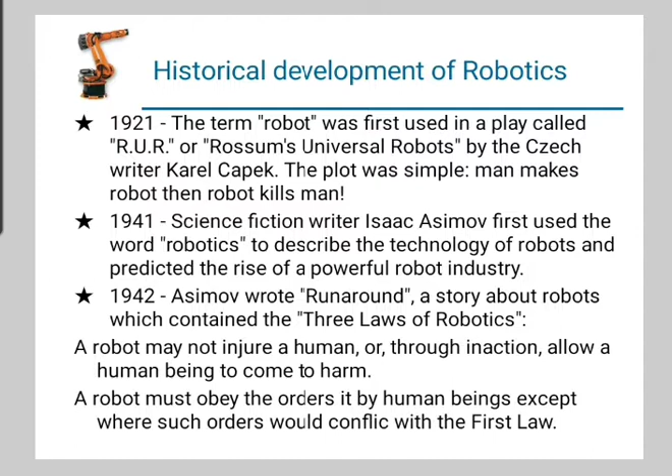The first law is the robot may not injure a human or through inaction allow a human being to come to harm. A robot must obey the orders given to it by a human being, except where such orders would conflict with the first law. Then the robot must protect its own existence as long as such protection does not conflict with the first or second law. So these are the three laws.

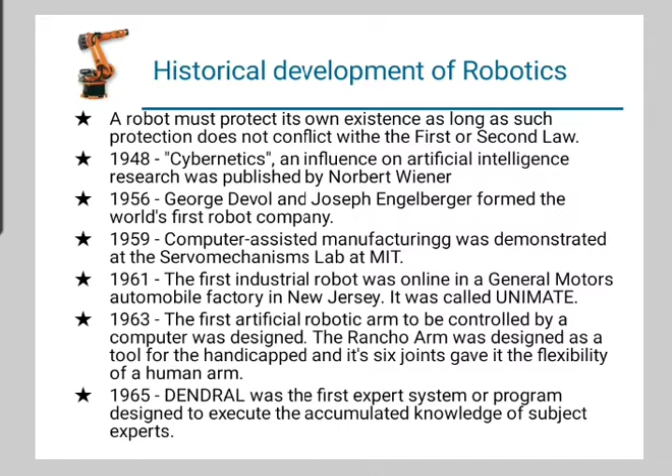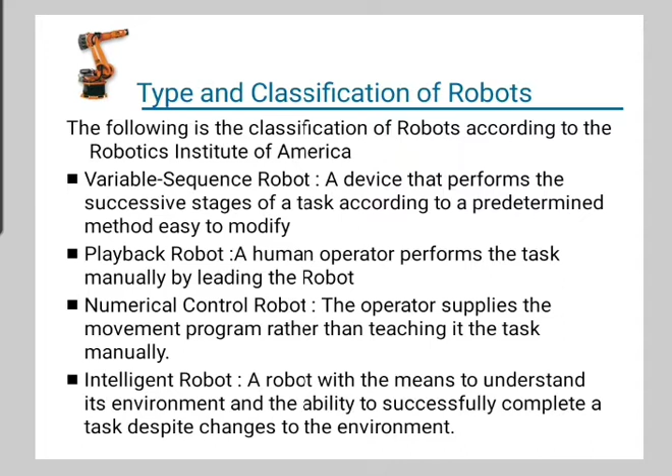And what does intelligent robot mean? A robot with the means to understand its environment and the ability to successfully complete the task despite changes to the environment. So intelligent robot means the robot can understand the environment and successfully complete the given particular task.

Then Asimov's law of robotics. There are three laws of robotics. The first law is a robot may not injure a human being, or through inaction allow a human being to come to harm.

Then the second law is a robot must obey orders given to it by human beings, except where such orders would conflict with the first law. And the third law is a robot must protect its own existence as long as such protection does not conflict with the first law. So these are the three laws of robotics.

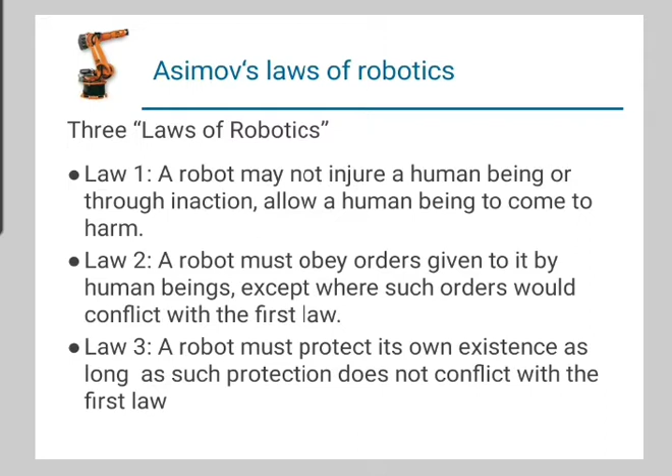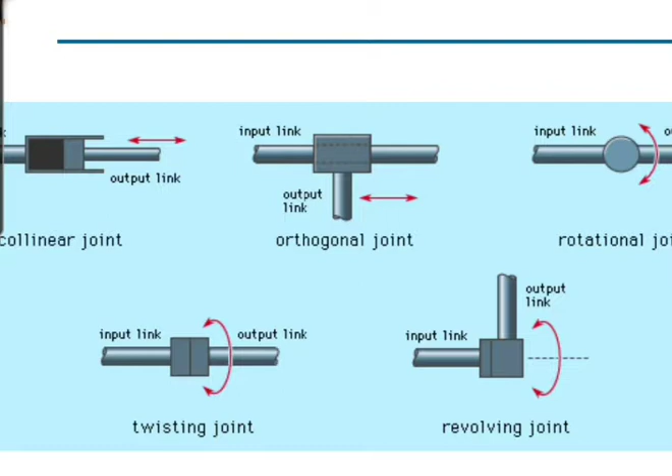Now this diagram shows robot joints. The first diagram shows the collinear joint, with the input link and output link. The second diagram shows the orthogonal joint, input link and output link. The third diagram shows the rotational joint; joints are rotational. The fourth diagram shows the twisting joint, and the last diagram is the revolving joint. So these are robot joints.

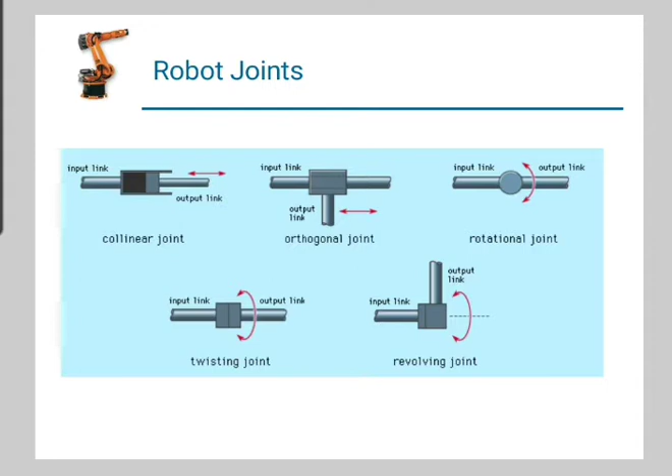Then these robot joints include two types which provide linear motion and three types which provide rotary motion. There are two types that provide linear motion, and three types that provide rotary motion. These five types of joints are rotational joint, linear, twisting, orthogonal and revolving joint.

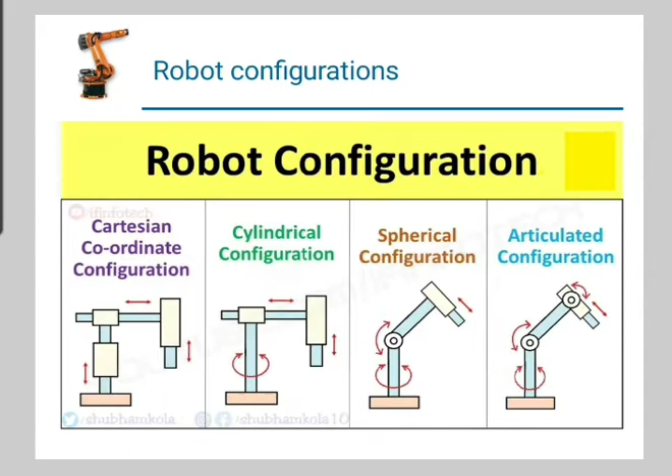Next is the robot configuration. Some of the commonly used configurations in robotics are Cartesian or rectangular. These robots are made of three linear joints, as clearly shown in this diagram, that orient the end effector, usually followed by additional joints.

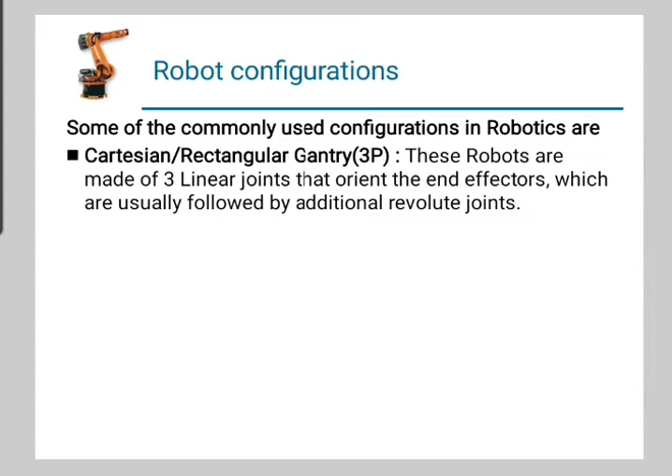Which are usually followed by additional revolute joints. Then the next is R2P, that is cylindrical. Cylindrical coordinate robots have two prismatic joints and one revolute joint.

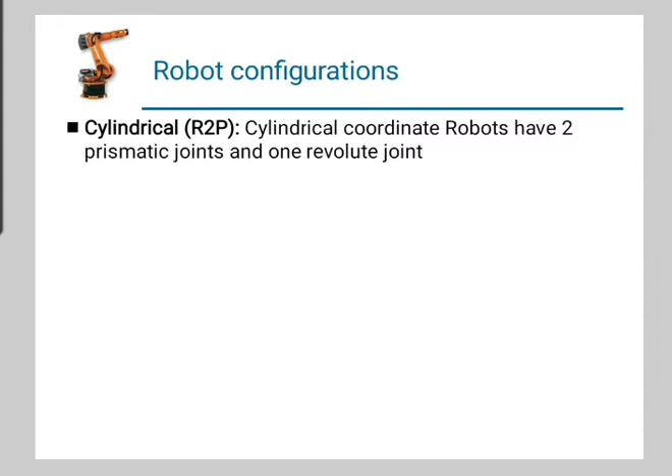Then spherical joint robots follow a spherical coordinate system, which has one.

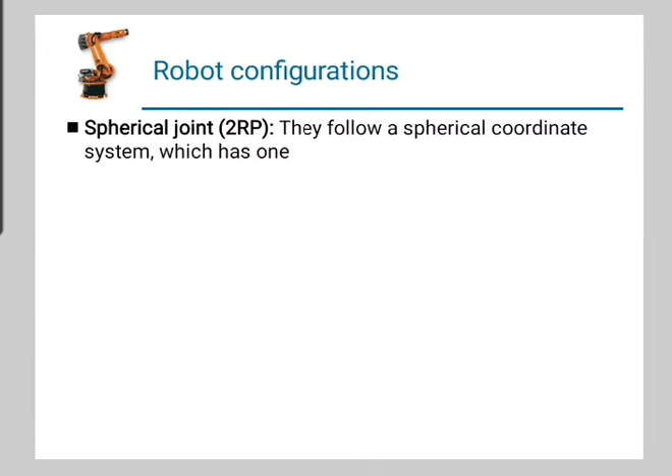Then articulated, or anthropomorphic. Here a diagram of articulated robots is shown. Here all joints are revolute, similar to the human arm.

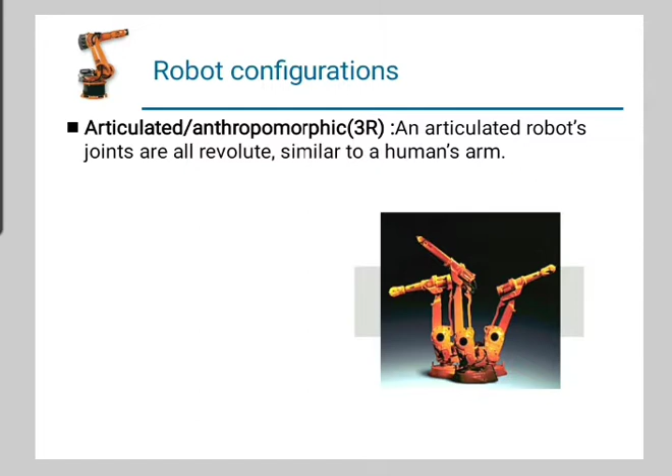Then the next is selective compliance assembly robot arm. They have two revolute joints which are parallel, allowing the robot to move in the horizontal plane, plus an additional prismatic joint that moves vertically.

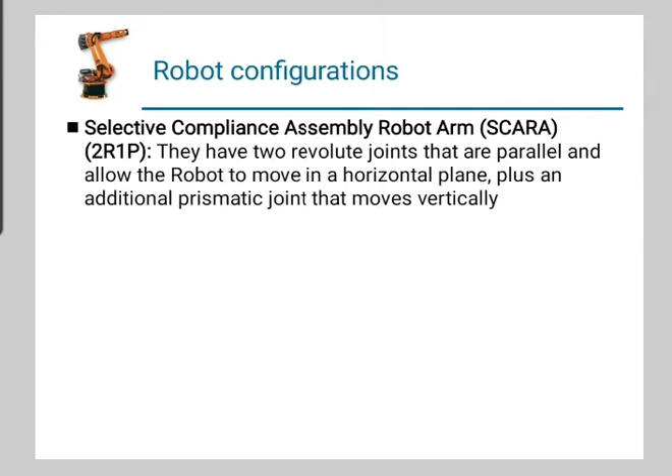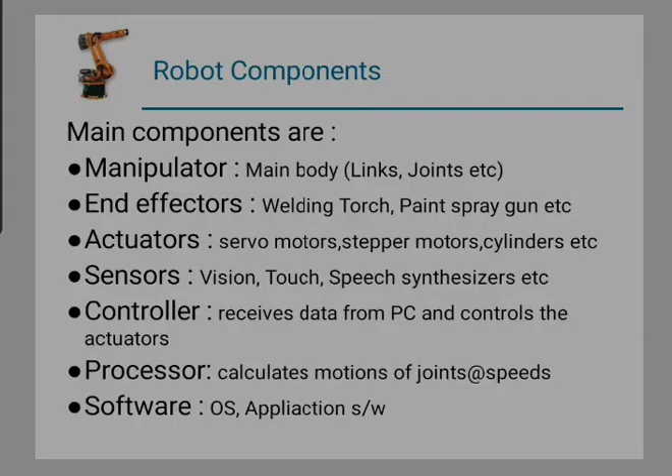Next is the robot components. These are the same as that of human beings, that is elbow, wrist, tool. Tool is a different part. Shoulder and waist. So stiff joint and compliant joint we have already seen, the degree of freedom for the different joints.

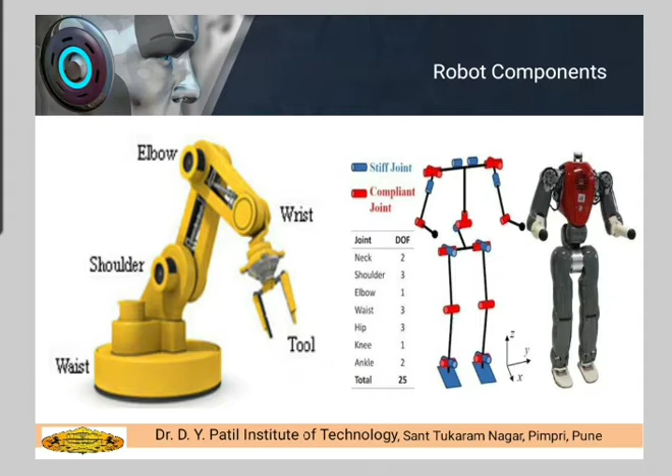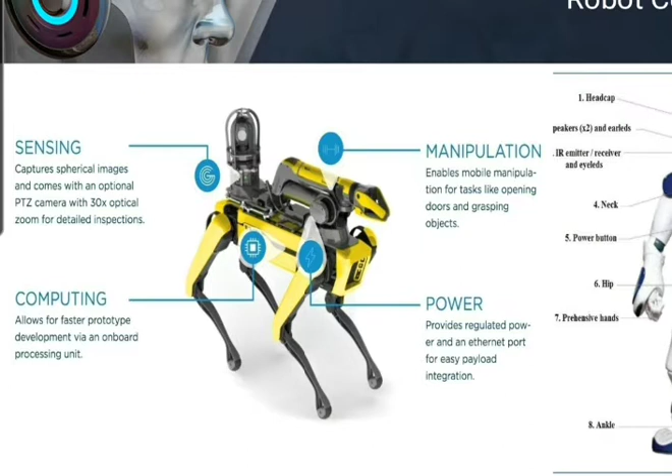Then next is this robot component, that is sensing. Sensing means it captures spherical images and comes with an optional PTZ camera with a 30x optical zoom for detailed inspections, so the image will be more clear.

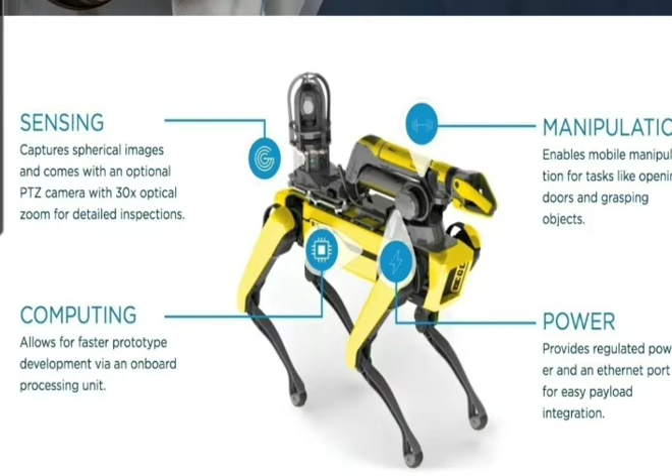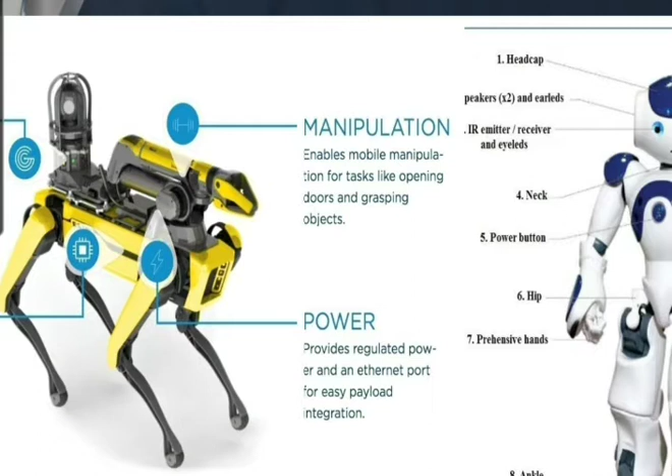Then next is computing, which allows for faster prototype development via an on-board processing unit. It also consists of manipulation, enabling mobile manipulation for tasks like opening doors and grasping objects. Then power, it provides regulated power and an Ethernet port for easy payload integration.

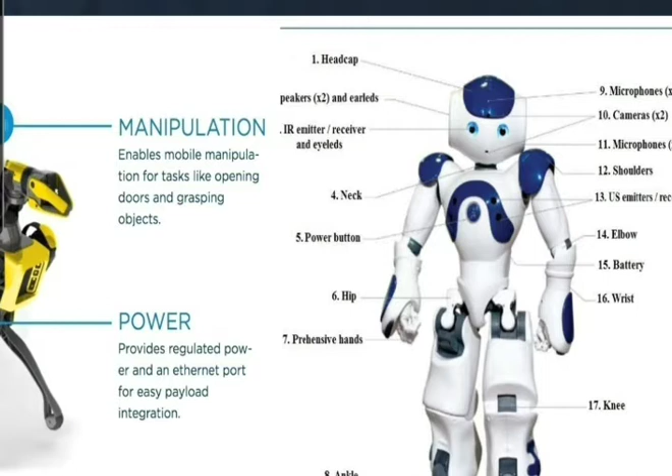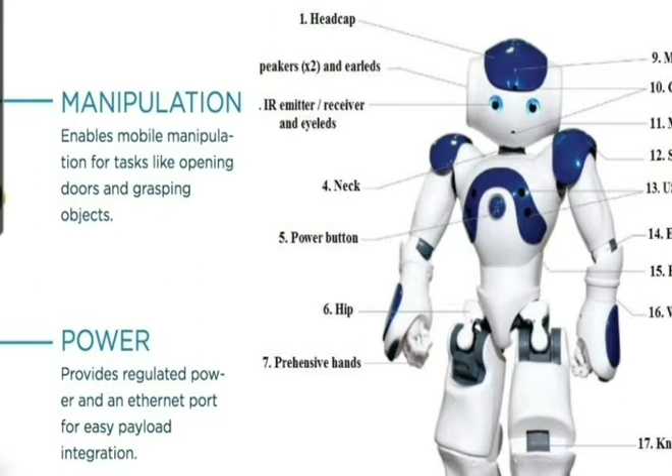Here the diagram of the robot is given, which consists of the head cap. The different parts are given here: ear LEDs, IR emitter or receiver, neck, power button (at the center), hip, prehensile hands, bumper, knee, wrist, battery, which is also below the power button.

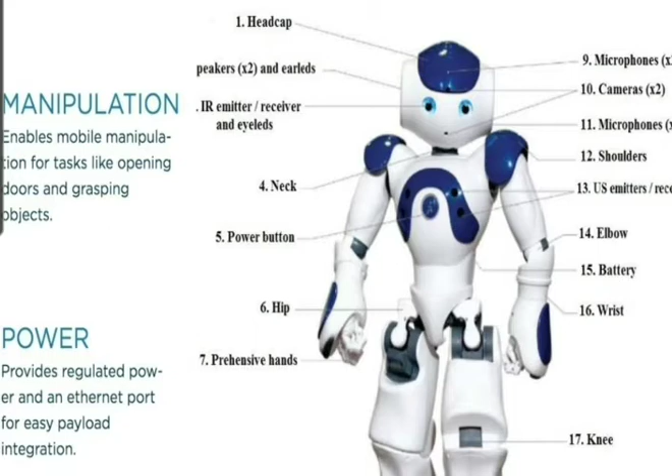Then elbow, US emitters and receivers, shoulder, microphone, camera, and one more microphone which is at the forehead. So these are the different components of the robot.

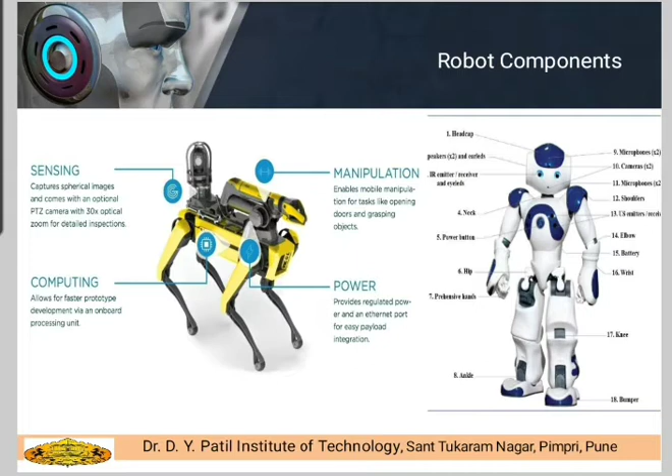Then the next is robot degree of freedom, that is the number of independent movements a robot can perform in 3D space. What is degree of freedom? It means the number of independent movements a robot can perform in 3D space, or the direction in which the robot moves when a particular joint is activated.

To fully place the object in a space and also orient it as desired, we need to have 6 degrees of freedom. A system with 7 degrees of freedom does not have a unique solution, that is a robot which is mounted on a conveyor belt or mobile platform.

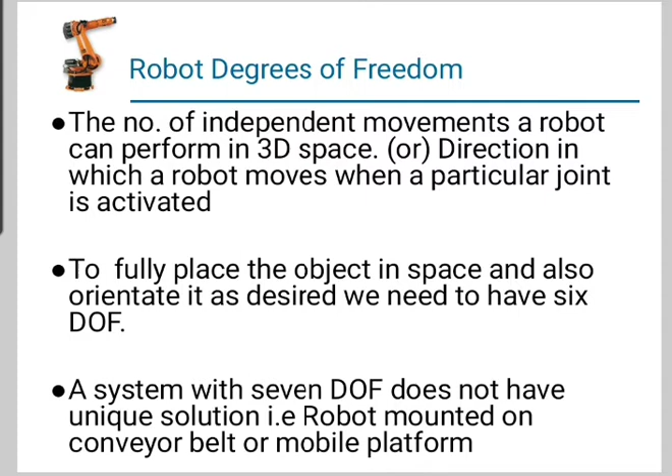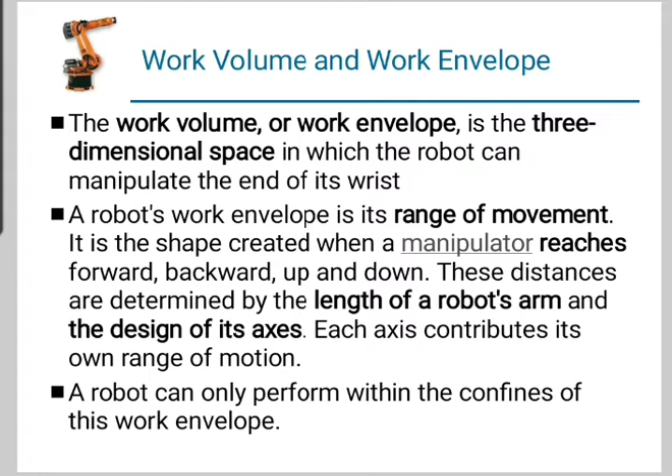Then work volume and work envelope. The work volume or work envelope is a three-dimensional space in which the robot can manipulate the end of its wrist, and the robot's work envelope is its range of movement. It is a shape created when a manipulator reaches forward, backward, up and down. These distances are determined by the length of the robot's arm and the design of its axes, and each axis contributes its own range of motion. So the robot can only perform within the confines of this work envelope, that is the working pattern of the robot is fixed.

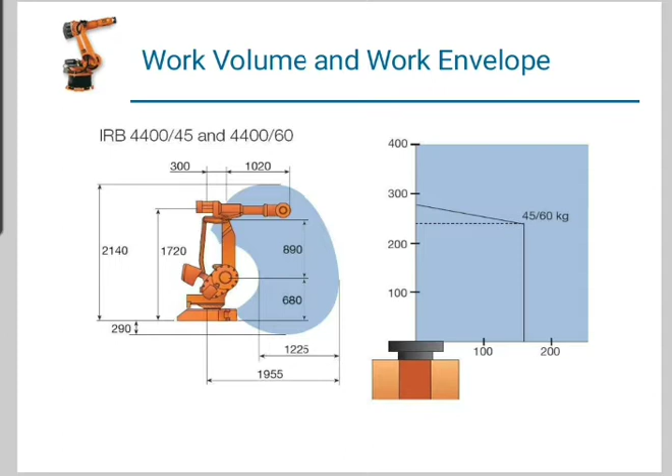Robot coordinates. For any industrial robot, there has to be a certain coordinate system for proper functioning of the program. Targets of the robot in space are located by measurements along the axis of the coordinate system, and the coordinate systems are defined by the geometry: Cartesian coordinate system, polar coordinate system, cylindrical or spherical coordinate system.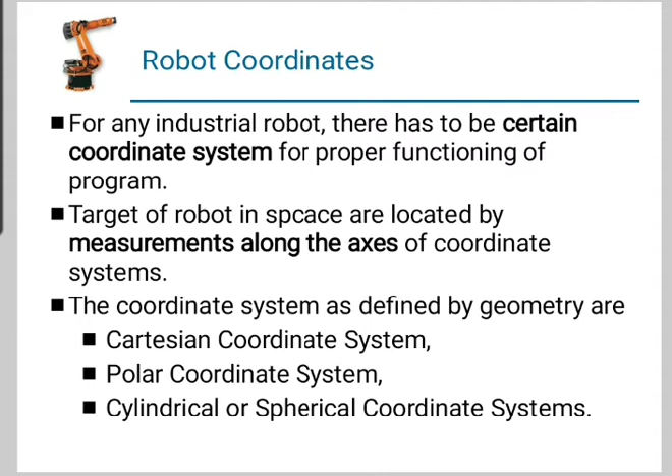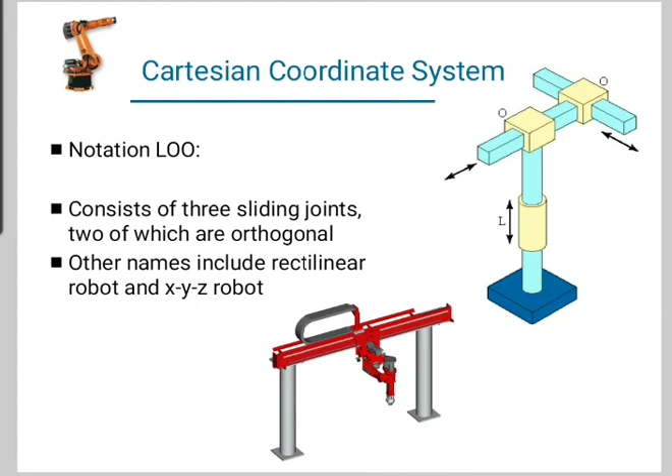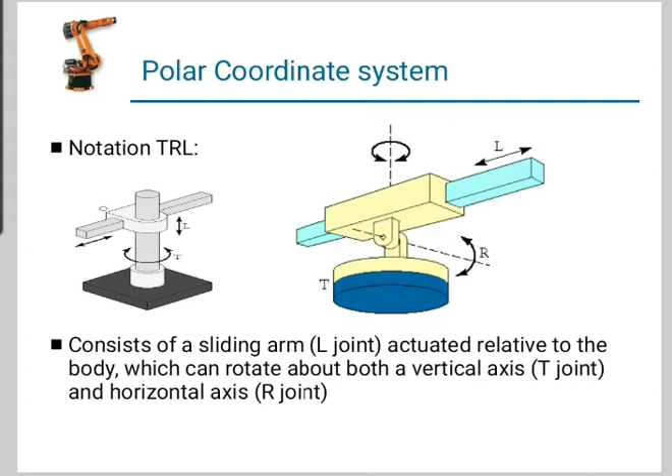Cartesian coordinate system. The coordinate systems are defined by the geometry, like Cartesian coordinate, which we have already seen. The diagram for the Cartesian coordinate system is given here. And the next is the polar coordinate system. The next, cylindrical coordinate system. Thank you.